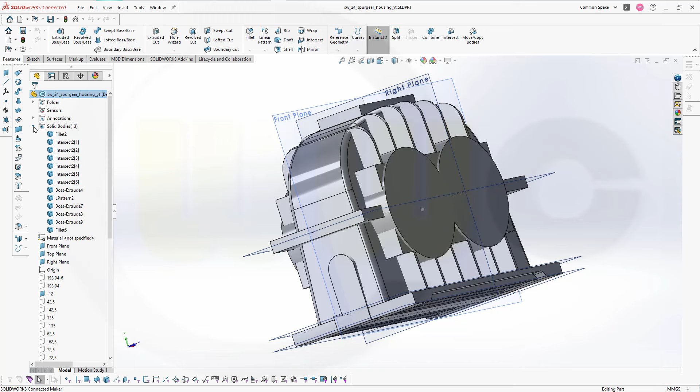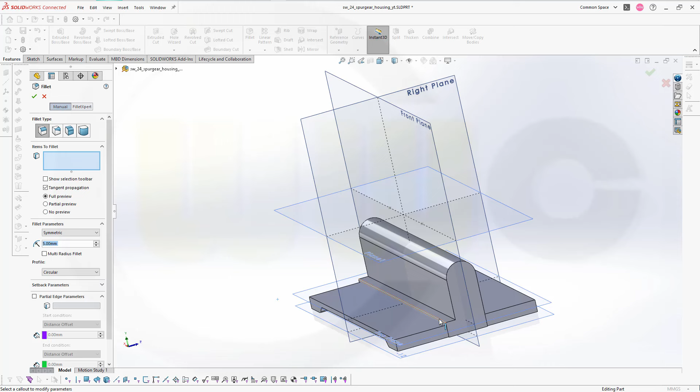So, first I want to fix that problem here. Therefore, hide those bodies, maybe like that. And I will need this one here, so bring it back. Okay. First do the fillets here on that solid. So go for fillet, make it 5 mm on this edge here, confirm, and another fillet with 2 mm on that edge and confirm.

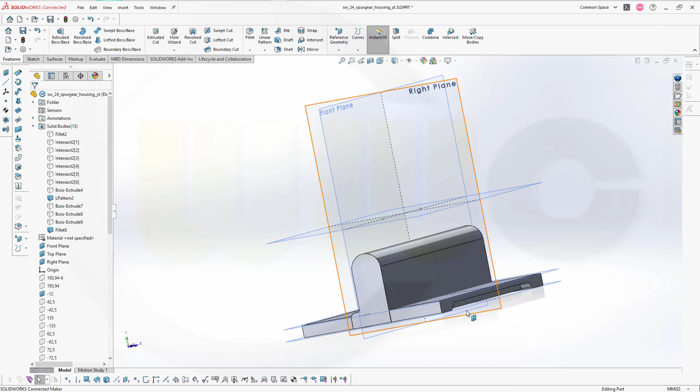Now I have to move those features before that cut is happening. So let's take a look. Maybe hide that plane. And that would be the second pattern. This one here, yes, and I have to go before the draft, the cut, so I have to go to that Boss-Extrude here. Because that's the one, so that would be Boss-Extrude 5, I suppose. So let's move Boss-Extrude 10 before 5.

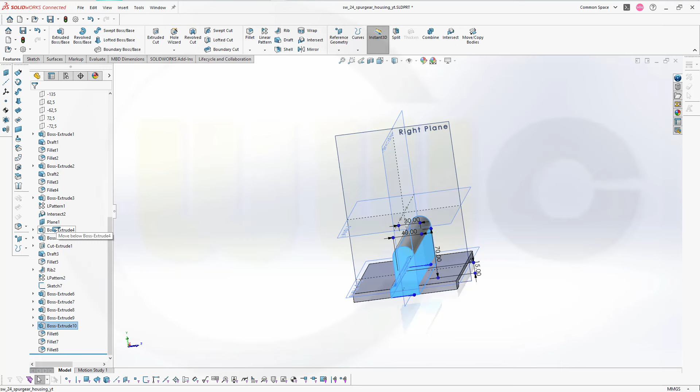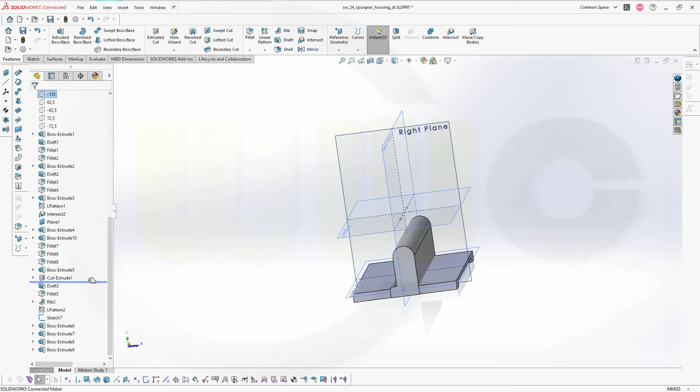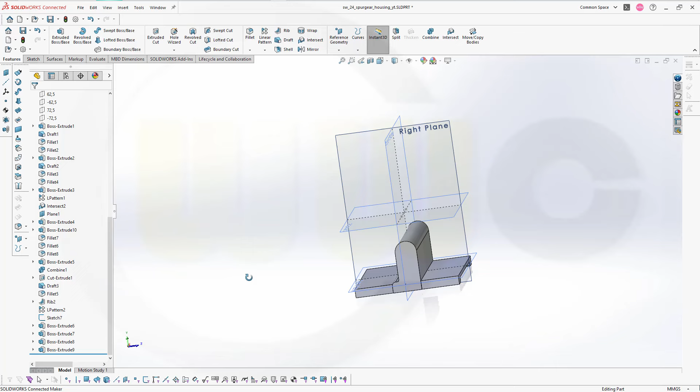Move it here, then move the fillet up, the second fillet, and the third fillet. Then move that up to this one, yes, and now we can make a combine. Let's combine this solid here and that solid, confirm, and go to the end of the tree like this, and the problem is fixed. Great. Now I can go for the handle at the top of that housing.

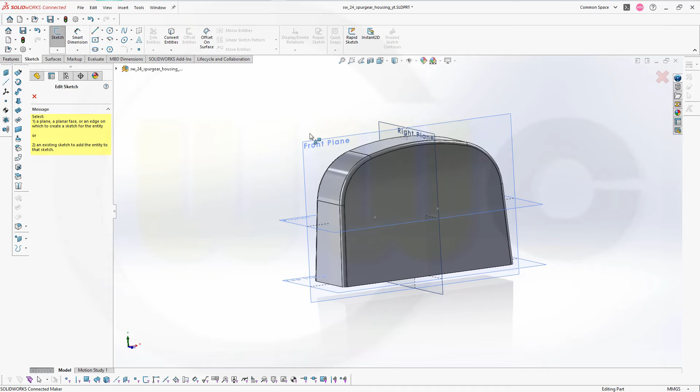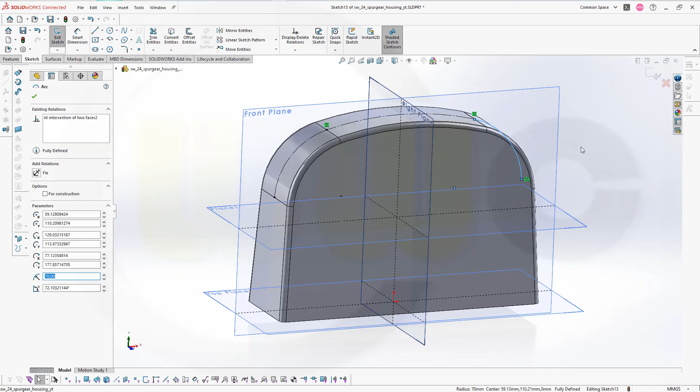Okay, let's hide those solids, or this one, and bring back that one. And we need a sketch on that plane here, so let's go for a sketch. Okay, a sketch on the front plane, and I want to bring in those contours. So let's see, what do we have? We can go for intersection curve, this, that one, and this one, and confirm, which gives me that curve here. Nice, but this curve should be for construction only. Over here, select it, and construction as well.

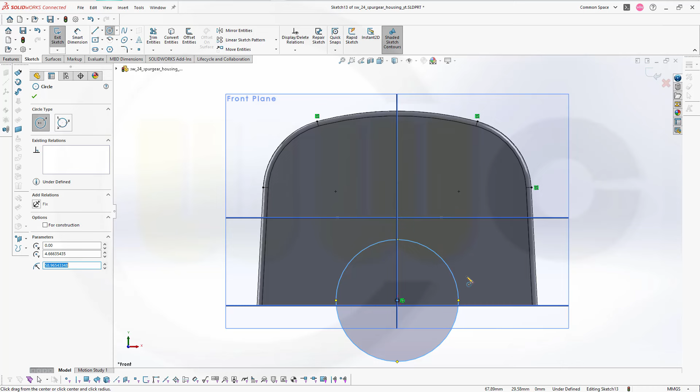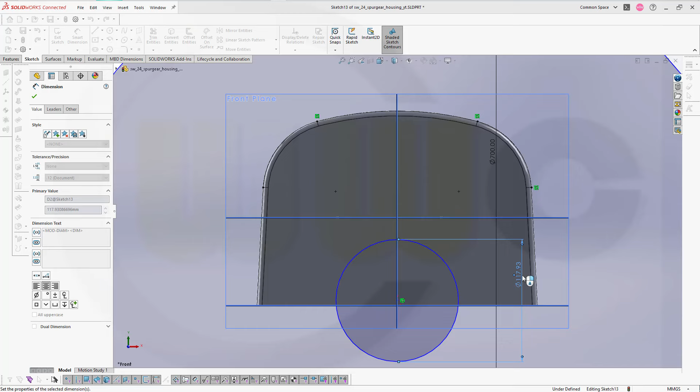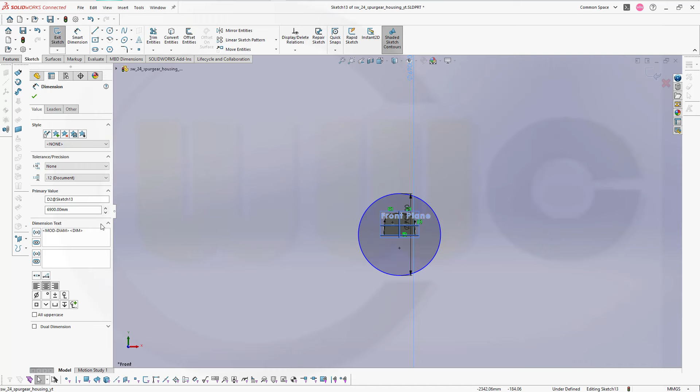Now I will need 2 circles. So I could try to snap here, see if it works. And one should be 700 and the other one should be 690. So let's go for dimension. This should be 700 in diameter. And the other one should be 690 in diameter. Okay, let's move them. So what happened? 700, and obviously I hit my numpad too hard. Happens. 690. That's more like it.

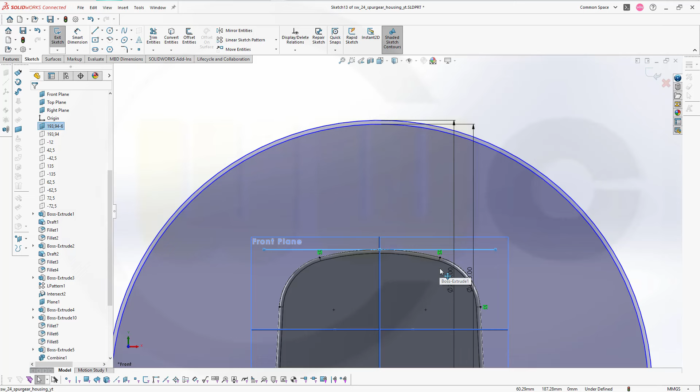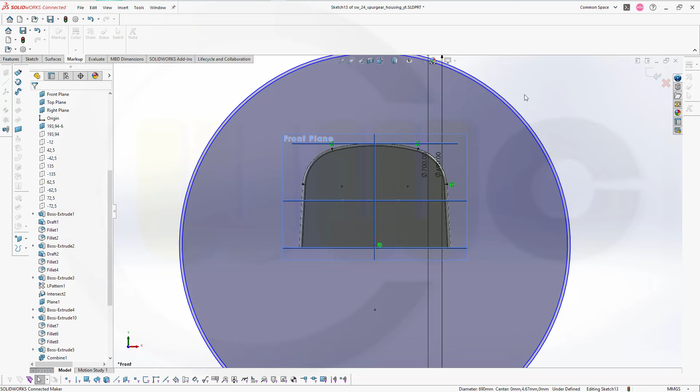I will need that plane here, so make it visible. And there should be a tangency constraint between that plane, which is up here, yes, and that circle. So maybe move those circles down, make sure nothing is selected. Did I snap onto something? I don't think so, but possible. So let's try to make a tangency constraint between this plane and that circle up here. Yes, that's okay. Now I need two more circles.

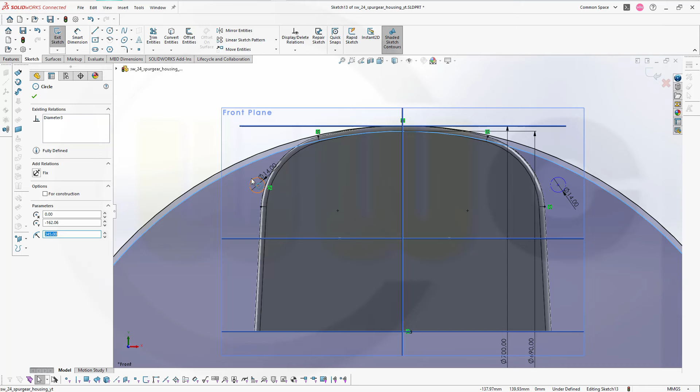One over here, one over there. Not like this, but it should be here, of course, and the other one should be over there. Okay, both of them should be 14 millimeter in diameter. This one as well. And both of them should be for construction only. For construction, and this one for construction as well. Nice. And now we go for tangency. So this here and that one should be tangent. Also this one and that one should be tangent as well. Same here, this one and that one tangent, and this one and that one tangent.

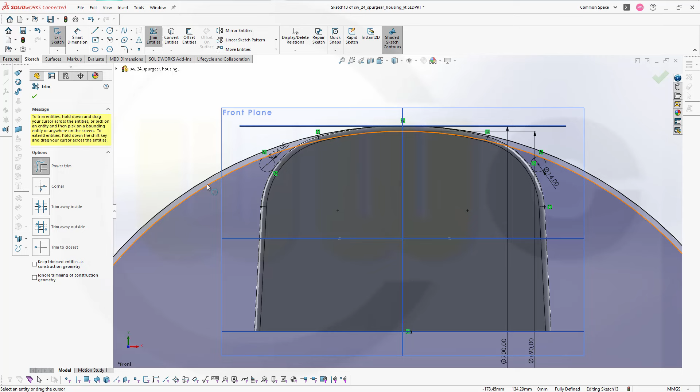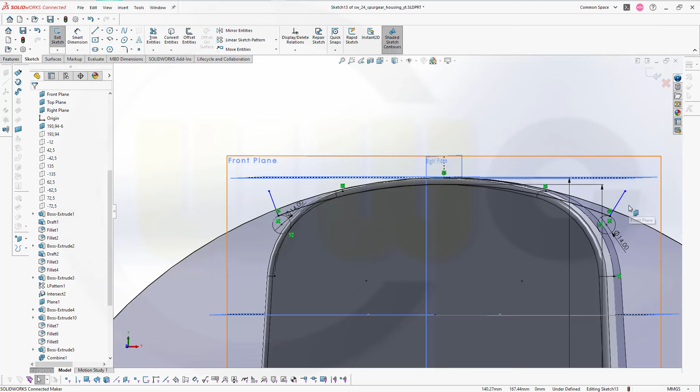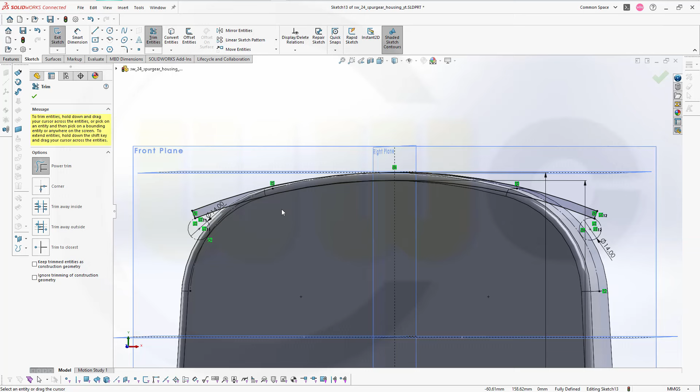Now I should be able to trim at least this one here. Okay. Now I will need a line which goes from that endpoint up, and another one on the other side from that endpoint up. Okay, now this point and that line should be coincident. Yes. Same over here, that point and this line should be coincident. Now I can trim. This should be removed, that should be removed, and this should be removed. Looks good, so let's finish that sketch.

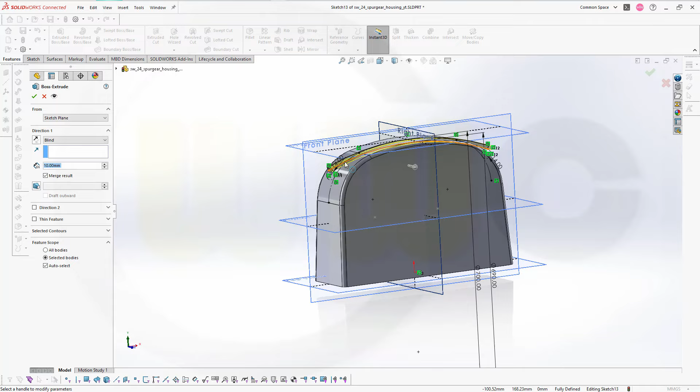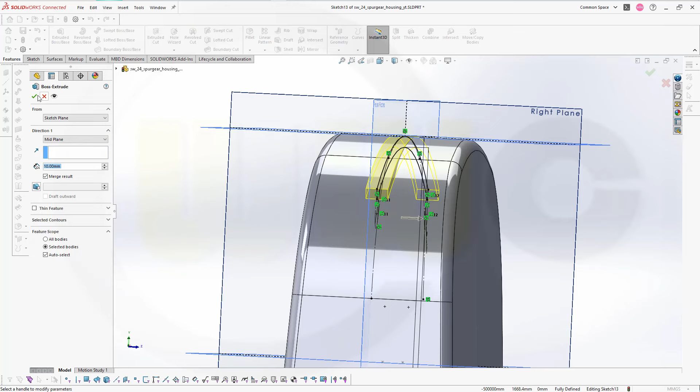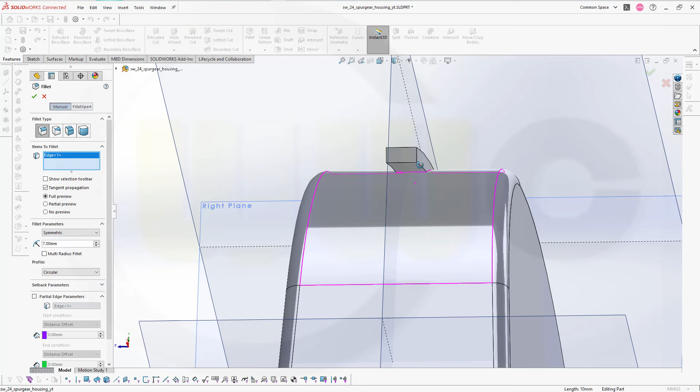Let's make an extrude. Maybe hide those sketches. Oh, they will be hidden. So go for features, extruded boss/base. That's the sketch here. Yes, it's selected, and it should be symmetric, so it should be mid-plane, and it should be 10 millimeters. That's okay, and it should merge with that body here. Yes. And confirm. Now I need two fillets with 7 millimeter. One here at that edge, and on the other side here as well. Confirm.

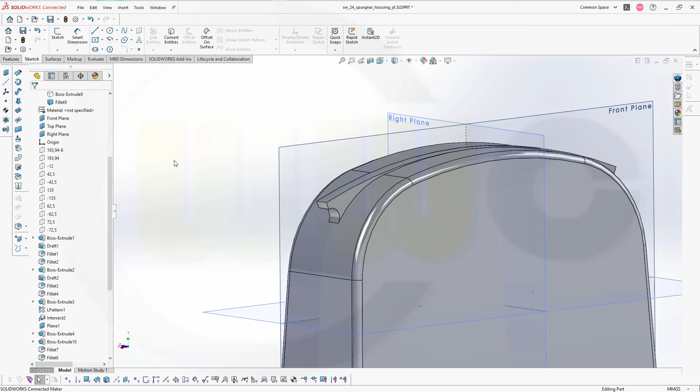Okay, nice. Let's hide this plane, and I will need those edges as paths for my swept cut. So for my swept cut I will need a path, a curve, and I want to go for a composite curve. Yes, and I want to select all those edges here, and hopefully we can use this all together. Okay, I will need a sketch on the right plane.

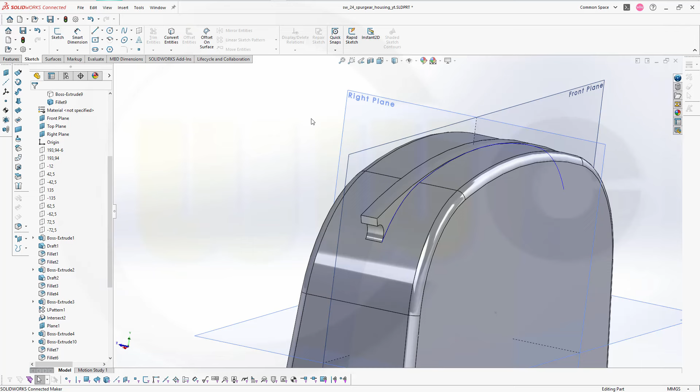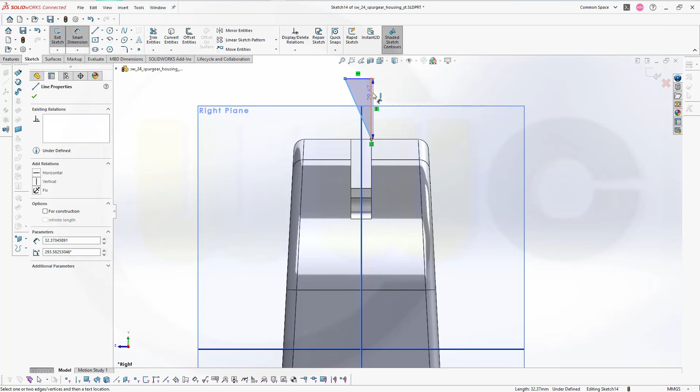Let's see if we can snap onto that point. Seems so, so let's go for our profile, and this should look something like this here. This could go straight up, and the angle here should be 10 millimeter. Not millimeter, but 10 degrees, of course. So leave that sketch. Let's see if we can use the complete path.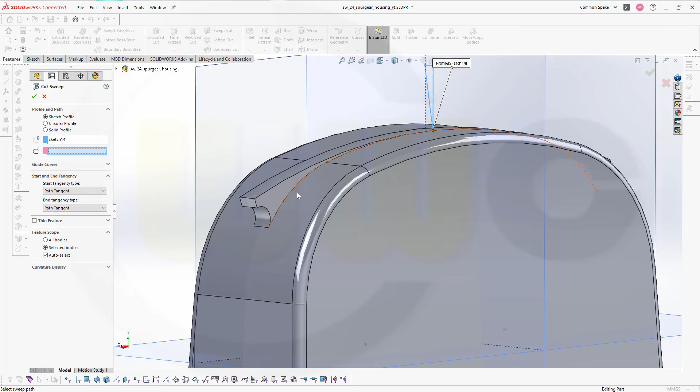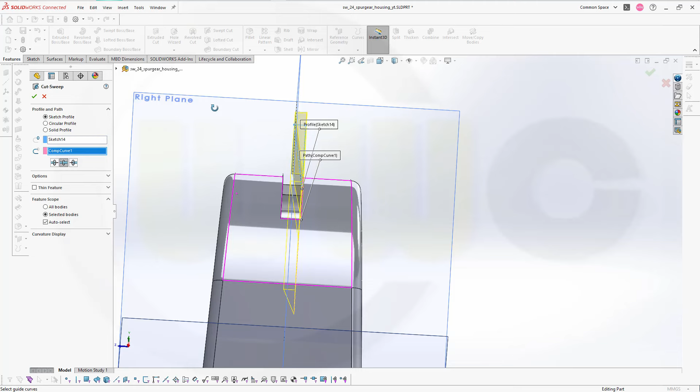So go for a swept cut. Profile is sketch 14, that's okay. And the path would be that composite curve. And again, it goes only to one side. So I want it to be bi-directional. Is that okay? Yes. This looks pretty good. So let's confirm this. Nice.

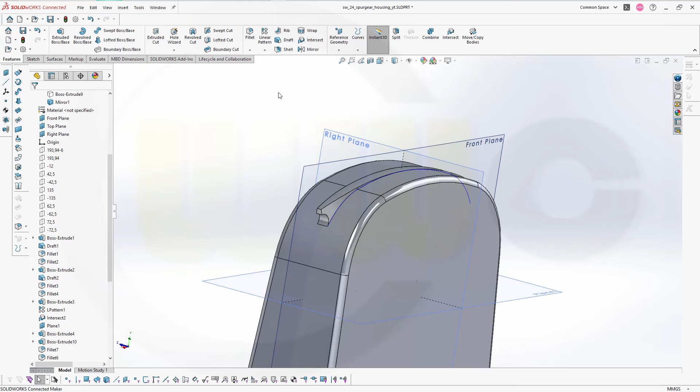And now I hope to mirror that feature. So where's the mirror command? There you go. I want to mirror a feature. The mirror plane would be the front plane, and the features to mirror would be that swept cut. And confirm. Looks good, looks great, and I'm done for today. So I hope this was helpful.